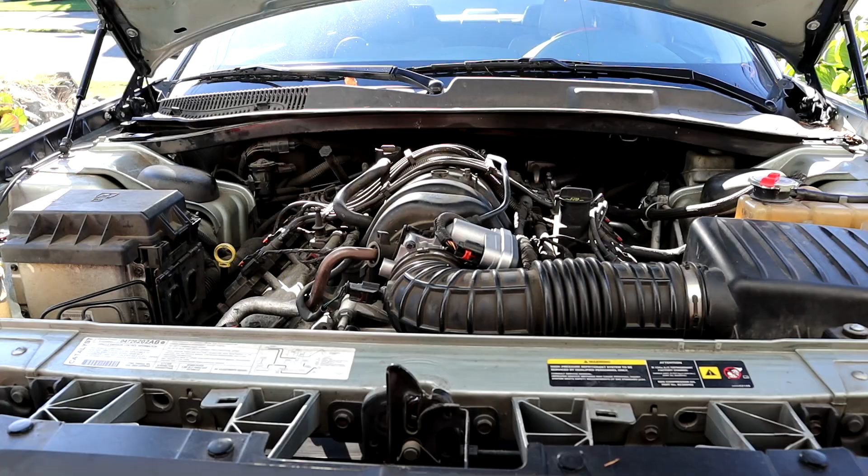However, we do want to take a couple things off this car before we let it go to some junkyard or something like that. And that is, well, probably the most important part of any project. This car has a Gen 3 5.7 Hemi, makes 345 horsepower and some amount of torque, 380, 330, I don't know, something like that. It's actually a pretty good engine, and people have used these engines in lots of cool builds, and we've got a couple build designs in mind for future parts of this channel that would benefit greatly from a nice V8 like this. So we want to harvest it.

That presents a couple problems. One, I'm pretty sure this engine will not fit out the top of this car in my garage. The engine is 26 inches tall, oil pan to top of the valve cover, and the lift gives me, I don't know, another 10 inches or something like that when we're lifting this thing up, and I'm pretty sure that will not make it out of this thing in the garage.

So we're gonna have to go pull this thing the old-fashioned race car way, which is actually go remove this front support here. So that would be this bar that runs out this way, and actually just yank this thing out the front. So that's one problem we're gonna have to cover.

The next problem is where to keep it. So we're in the garage. You see our Doritos Locos project is in here, and it's one of the shorter projects we have. It's basically going to be the shortest project car we could work on in this garage, and there's not a whole lot of space here. This is a big thing that's going to have to go away here, because this is in the way of me accessing all my tools and working on bikes and such like that.

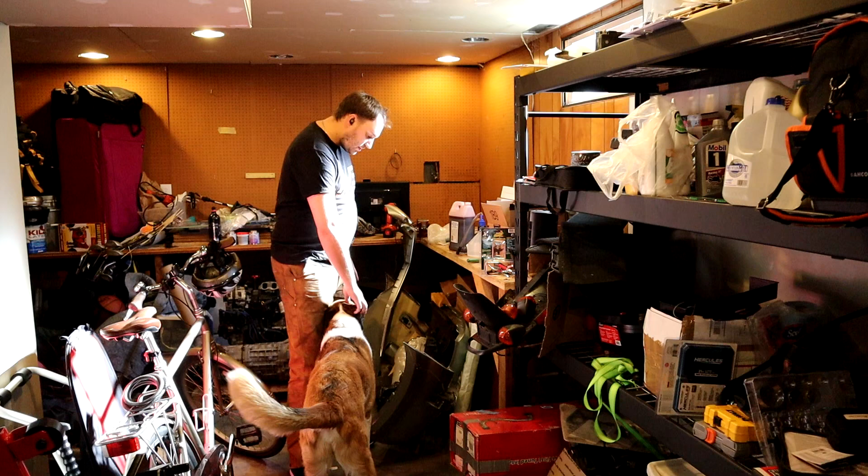So, hello Joe. Good morning. How are you feeling today? Yeah? Yeah? Happy puppy? You happy puppy today? There's so many spiders in here.

Anyway, so the ideal place to store this engine is actually underneath this table. However, I'm going to show you something that makes that particularly difficult. Most engine stands, or engine trolleys, or engine carts hold the engine quite high, relatively speaking, off the ground, because they don't want it to hit the ground, and you want to be able to run over some minor stuff on the ground and stuff like that.

But our engine is already 26 inches tall, and the bottom of this table clears about 35 inches, which only gives us 8 or 9 inches of clearance off the top of our engine where a mount can actually hold it up. So pretty much everything on the market, except for one that someone builds, but I'll show you guys a picture of that in a minute, holds the engine quite a lot higher than that.

Which kind of brings us to our video today, which is designing a new engine stand for our 5.7 liter Hemi that's going to come out of the Chrysler. So at this point, this is going to be a computer-based thing from here on out. So I'm going to go back in the computer and I'll see you guys there.

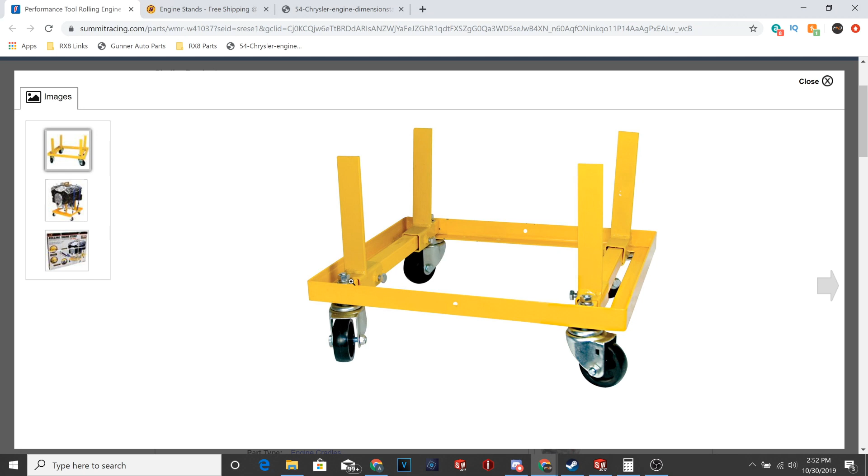Alright, so this brings us to the computer. Got it up right now on one of the rolling engine cradles, trolley stands, sorts of things. This one, as you can see, is kind of just a couple adjustable arms that come up off of a main center cradle here. This is made of L-channel tubing, L-channel brackets and stuff like that. And there's some square brackets in here. So something like this, while affordable, is not exactly what we're looking for.

This next setup, this is from Speedway Motors. They do a lot of cool stands. And you'll see there's a few setups. Most of these setups are actually for small block Chevy, big block Chevy, LS's, that sort of thing. And they've got some mobile ones, like this one down here, or this Chevy V8 cradle that have casters on them, as well as some non-mobile ones where if you're just gonna set it down for a while and move it around with the forklift, this would be fine.

But no one really makes one of these, except someone on eBay makes something that's pretty similar to this setup, this Speedway LS or the GM rolling LS stand. But I'd have to pay $130, $140 plus shipping to get one of these off of eBay. And we can make one of those.

We have all the fabrication equipment, and it sounds like a fun project to go make a rolling stand pretty similar to this, because this has the benefit of allowing us to access the oil pan down below and everything, and allows us to work on our engine without putting it back on the stand. So if you're going to do something like this, the first thing you want to do is try and find as good dimensions as possible on your engine.

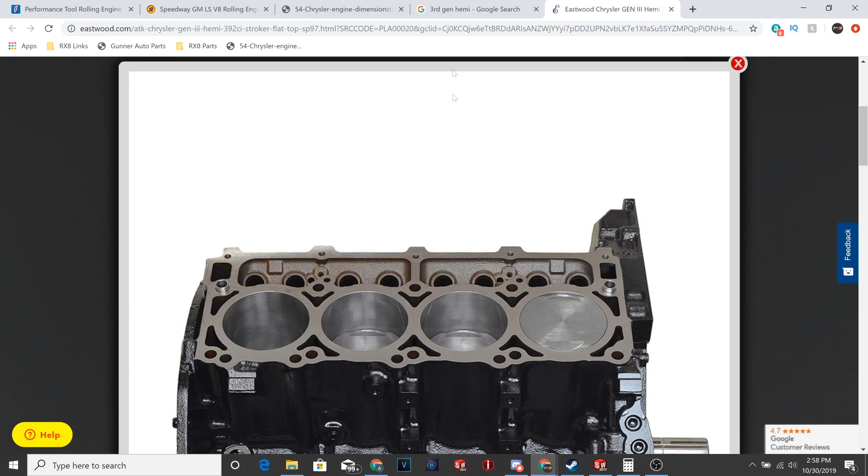So you can actually go in here, and if we get in close, something like this, you go look at this picture, and you can see that these mounting lugs here are actually shown, and one of the dimensions that we know we have is the height of this. We can get the height of the oil pan flange here from the bottom of the sump. And so that's going to help us set our clearance from the bottom, as well as make sure that we're not going too high. So the easiest way to do something like that is actually go into SolidWorks.

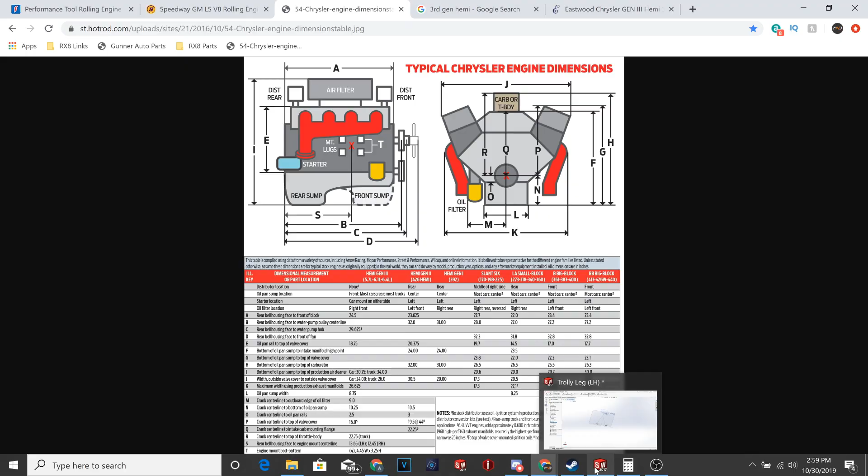I'll start a new thing here and show you what to do. If you're using a different CAD program, most of them have a similar feature. Sketch, we'll create a sketch here. We'll create it on the front plane. And then actually there's a tool in SolidWorks, so you go into your sketch tools, and it's called Sketch Picture.

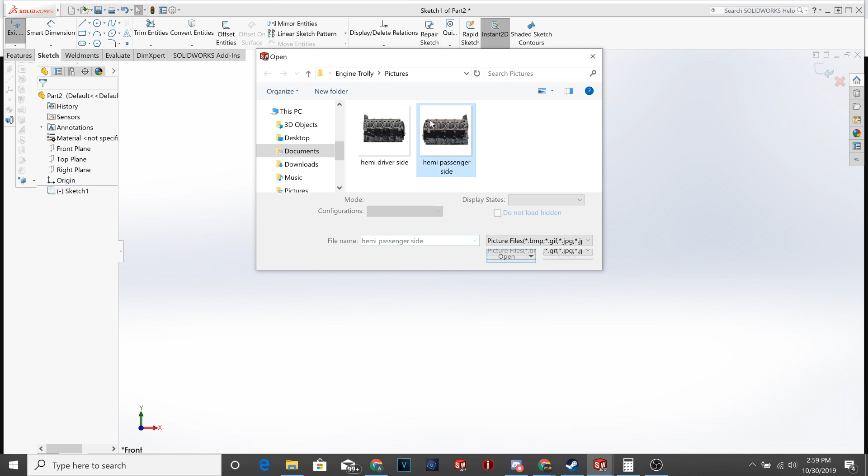And you can throw in a picture like this. And so it's going to go in at whatever scale bitmap it wants to. Maybe. Hopefully we don't crash this. Notice this is huge right now. But this is a picture to scale, and it's a pretty close side-on view.

You'll notice this is supposed to be, if you're looking at an engine, this is a flat surface, and this is a flat surface. So these are angled a little bit, which means essentially every picture, if you're going to use a picture like this and not a diagram or schematic, every picture is going to have a little parallax because the camera lens is very small. The camera lens is like the size of this area, and so it's catching everything. You're getting a little bit of fisheye going on pretty much with every side picture.

This is why if you were going to try and use photos to measure everything on this block, you'd actually take several photos from every angle and then use software to stitch them together so that you can account for that fisheye by catching everything from multiple angles. But something that looks pretty close right here. And so what you actually do is go, yep, sketch picture looks fine.

And then my suggestion, if you can do this, is actually draw over the picture. Let's say we're gonna draw something like, I'm gonna draw that, and move this so that it's, oh gosh, why are you doing this to me? Computer, delete. Move it so it's on this edge here, and then you draw another center line somewhere over here. Make sure they're vertical.

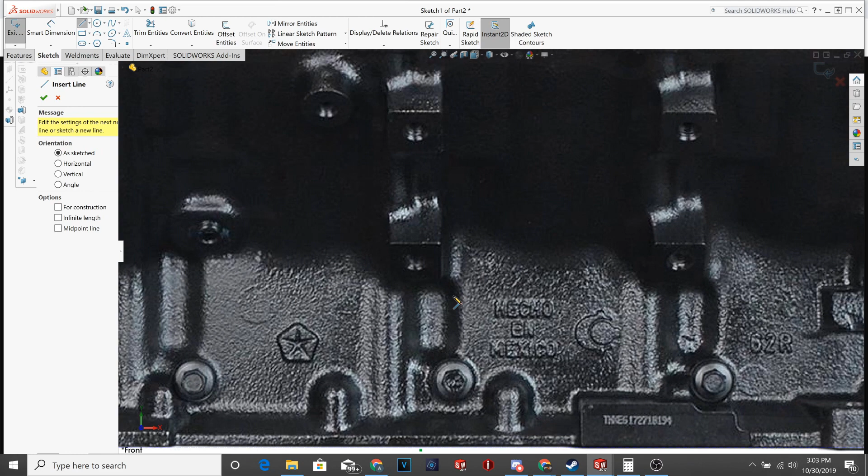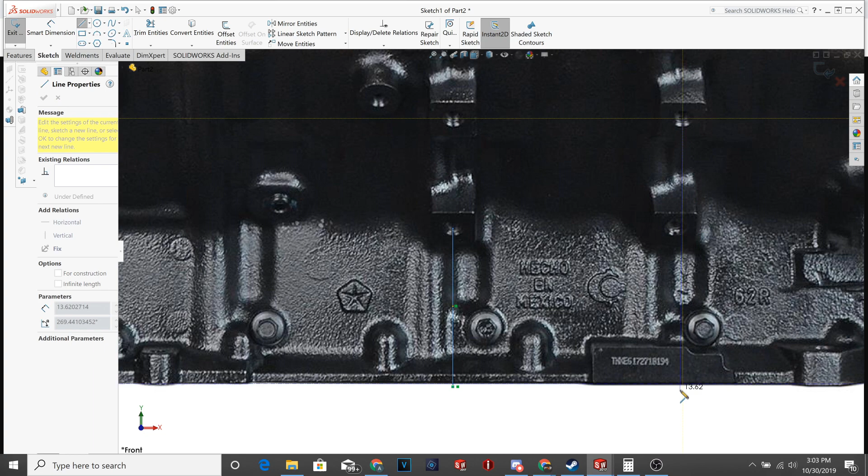Quick little thing, we're going to extend entities, extend that, and that's good. And then what you can do is, if you zoom in a bunch, you can actually find the center line. Notice these are off axis, but you pick something that looks pretty close to the center of your hole and draw a 90-degree line straight down to that construction line we made earlier. And then you can even do this, pick what looks like about center line of that hole and draw a 90-degree down that center line.

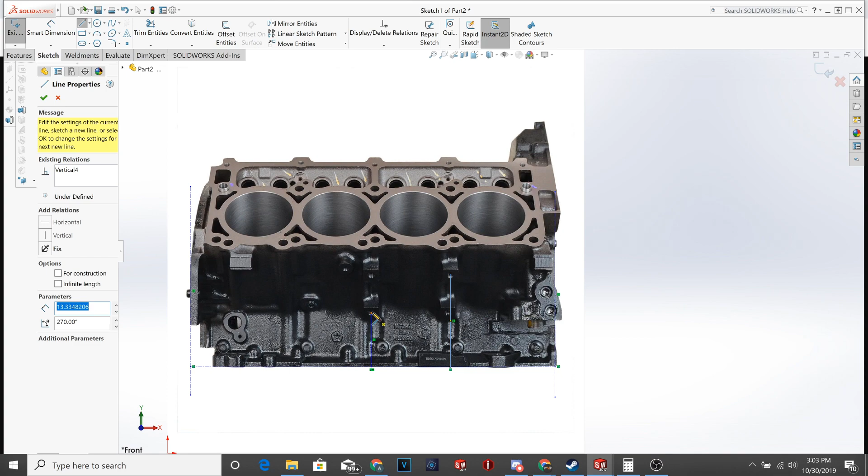And then these can give you a couple things, but what it can essentially let you do is triangulate the center points of, and you'll notice the camera parallax is going to get us here, because look at this, we're at the center of this hole here and this one's not lined up, and this would be the same up here, right? Which is not ideal, and some of these nubs might also be offset. These are some of the things that we have to just assume, that these are pointing straight out of the block and they're not offset or anything.

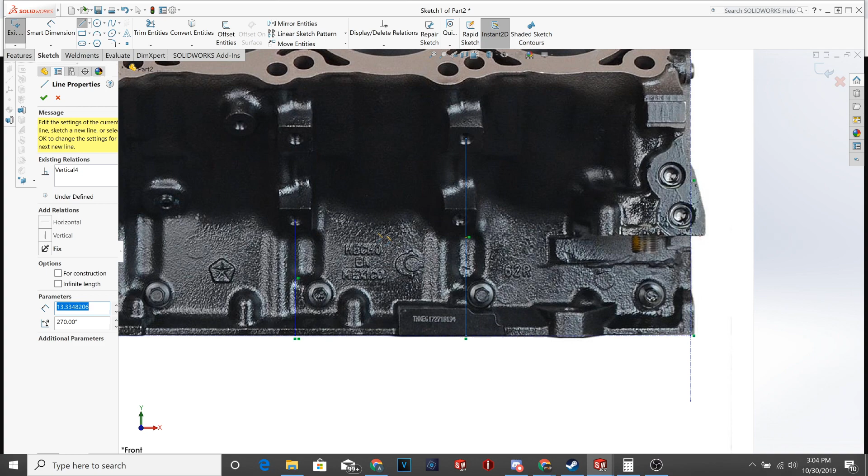But some of the camera parallax will get us here, but we can take those measurements and we'll just toss a measurement on this right now. We don't care what this number is right now. We're not using this to set anything. And then we'll get a measurement over here, and then we'll get a measurement here. So what we use this measurement, this is the block front to back, pretty close, right? So the idea is we can scale this entire sketch based on this measurement block front to back and compare it to our block measurements here that were taken on an actual block. So the rear bell housing to the front of the block is 24.5 inches, according to this right here.

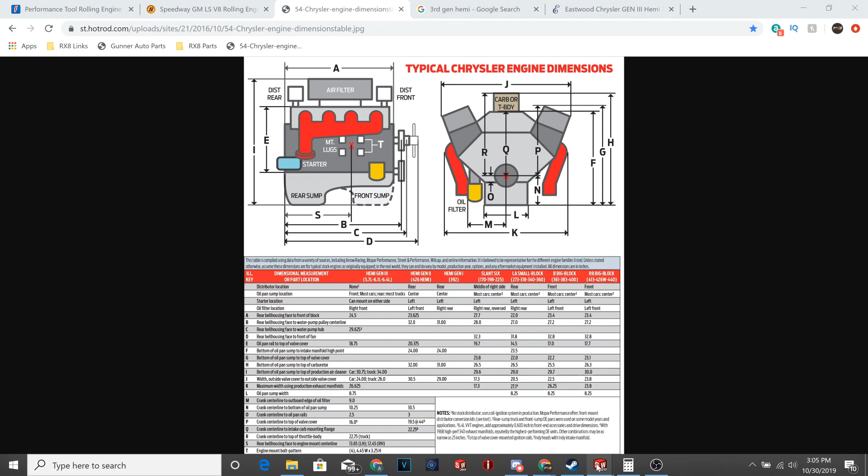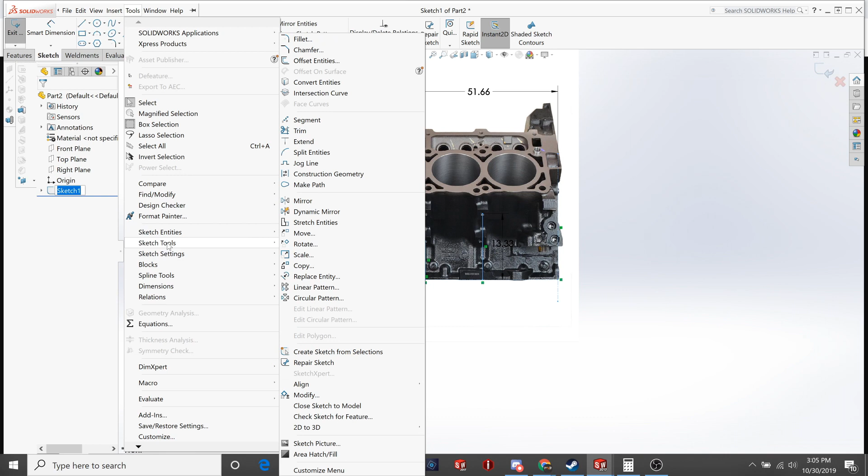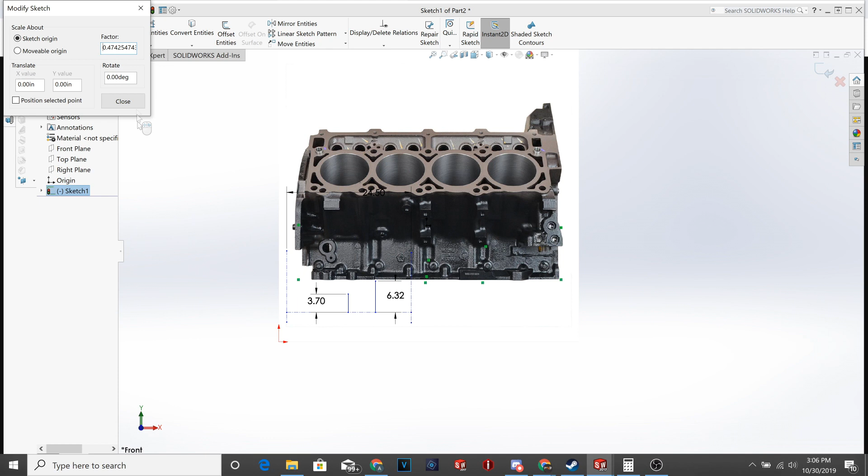So what we'd actually go do in this sketch is, yep, that all looks good, cool, and we'll get done with this sketch, and then we'll go in here, sketch tools. We'll modify this sketch, and we will actually scale this. So this is a scale factor here. And we're going to scale this on a scale of 24.5 divided by whatever this front to back measurement is on our current thing, so 51.66. And if you do it right, we'll close this, rebuild that, and then we're just going to suppress this background here.

We open up this sketch again. You see that this front to back measurement that we just took has been scaled down to our normal measurement, and we get two measurements for verticals to the center line of our holes, and that's 3.7 inches to the bottom one and 6.32 inches to the top one. These are probably a little bit off, but note that our spreadsheet of information says it's a 4 bolt hole pattern approximately 4.5 inches by 3.5 inches. This is less, but we're catching 45 degrees of angle approximately. So these heights help us identify where the center of this piece is. And when you do the math, it's about 4 to 4.5 inches right in here where this piece will center line.

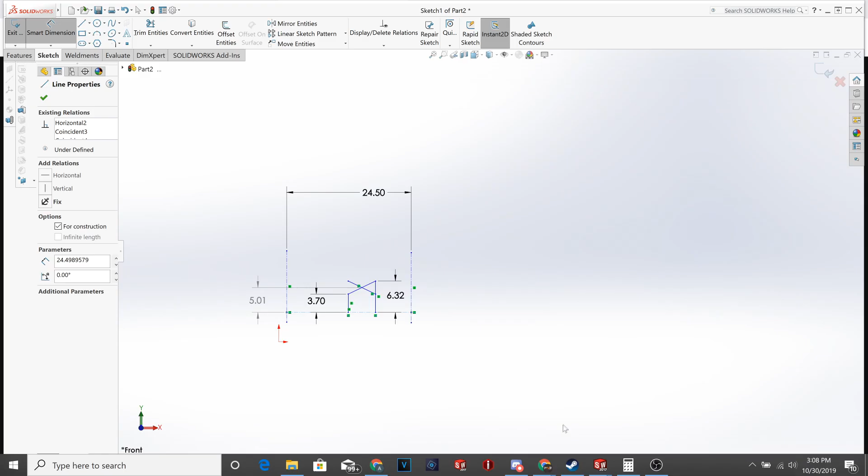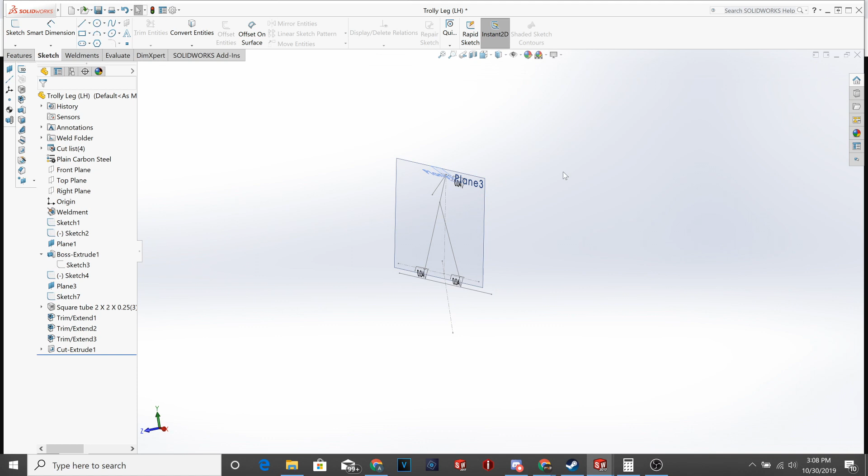So what we did here is we created a sketch. And we had to do several different planes. This is like your main bar down here, and then we located the center line of our plane of our mount bolt area up here, and we created a plane and a sketch up in here, and then we actually created ourselves something here. One thing to note, if you're going to build something like this, you don't want to draw a line straight from the center line of your mounting part here to the center line of this, because that's not actually how you're going to build it, which is why we drew our line like we did. So we'll get this back up once the computer catches up.

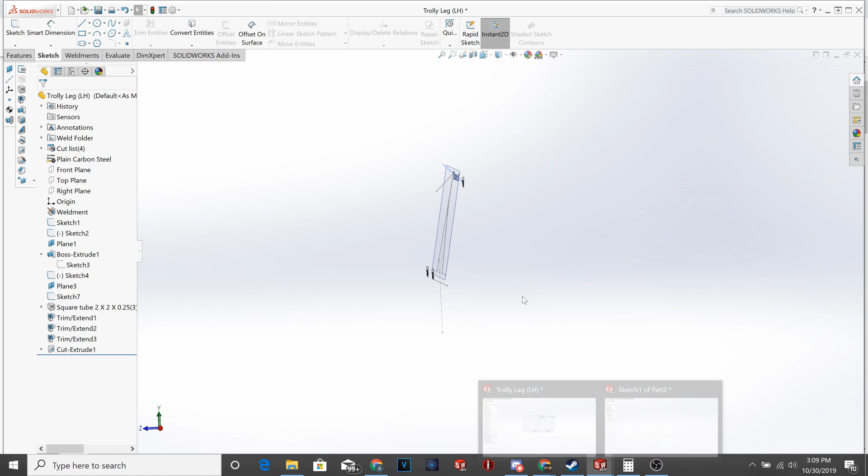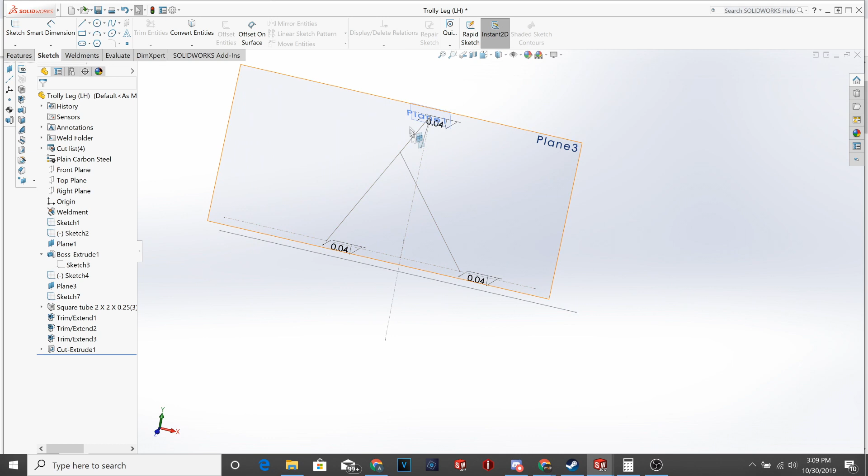We actually offset the line by 1 inch, which is the distance from the center line of our tube to the outside of our tube, and we're planning on using 2x2 square tube in this construction. So we created one line here and one line here, and then I'm going to unsuppress a couple things here. We're going to make this visible, and we're going to make this visible again, and it lets you come up with something like this. So this is our final design.

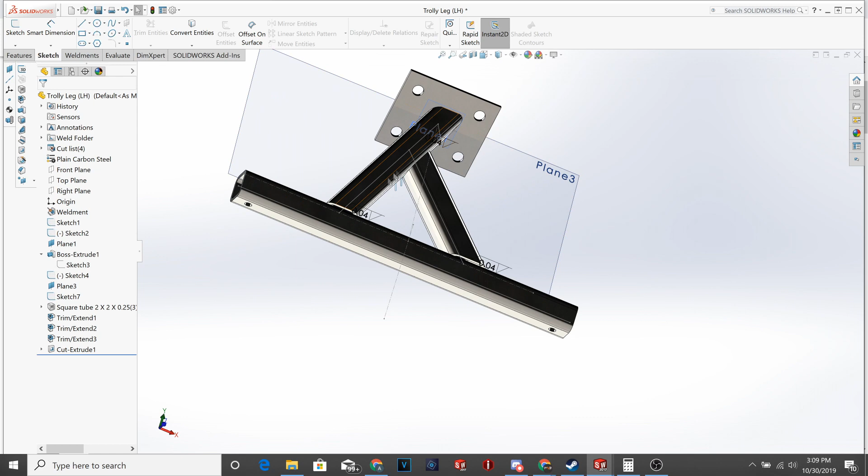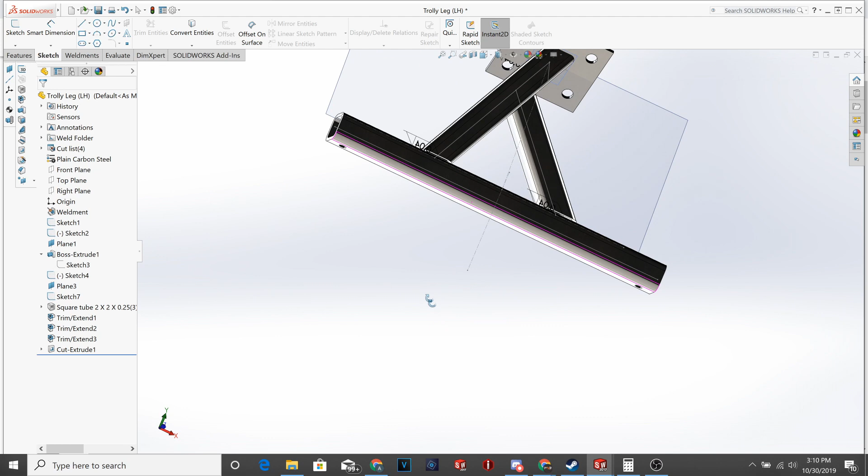Note we had to mess around with this tube location a bunch because we want to have enough clearance to get a bolt in this bottom. This looks like it'll be enough, but I mean, we'll see when we actually do it. If this doesn't work well enough, we'll just have to keep adjusting it until it works. But note, so we've got this, and we've set some materials so we can do some strength analysis on it, and then the only other assumption is we made the assumption that this mounting plate needs to be at 45 degrees from the vertical.

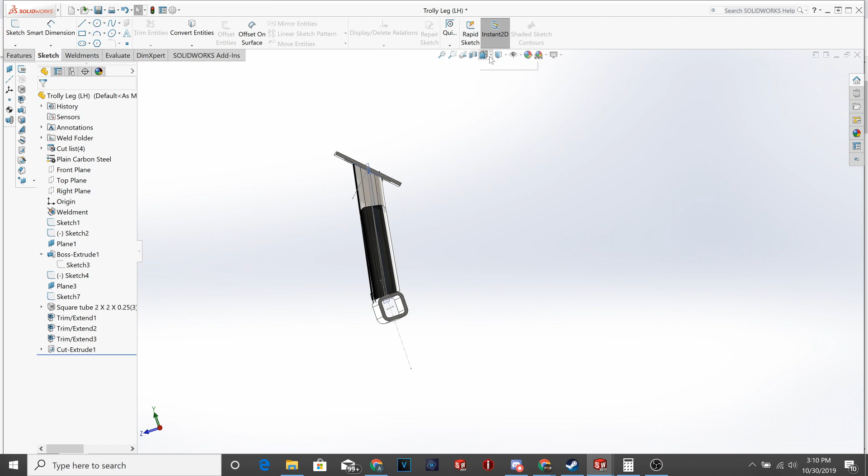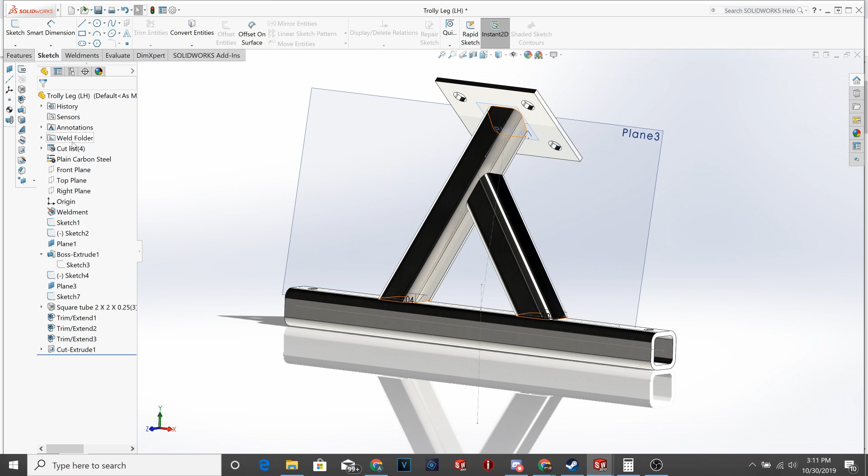So that's where we set that. That's pretty much the only assumption we made here. The other thing is, what's useful about this is if you look over on the left here, it's got a bunch of things. I created some welds in here so I could know about how much length of weld I'm gonna make, but it can also give you a cut list.

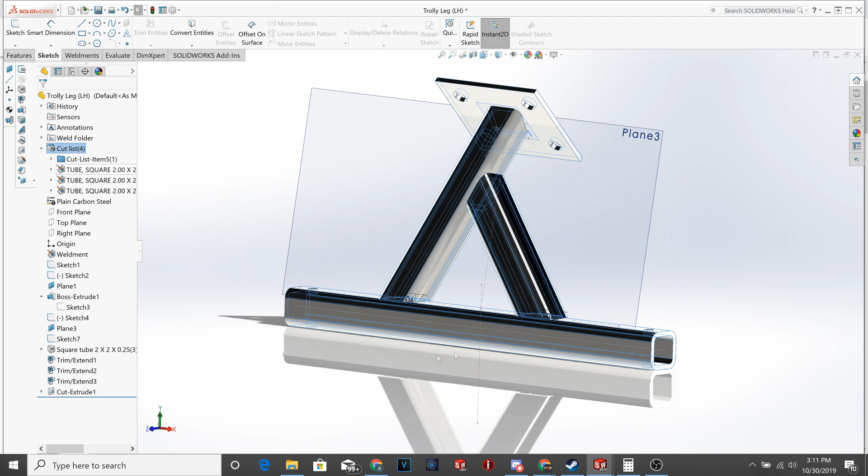So if you don't have the ability to cut material yourself, you can actually use most CAD programs. SolidWorks does this. I'm pretty sure Autodesk Fusion 360 has a feature that will allow you to do this. You can actually have this program spit out a list of cuts and angles, and it keeps track of all of these angles that we're making. So you can actually just send that to your metal supply shop and have them make the cut. And then all you're doing essentially is assembling everything together and putting the welds on if you're going to do that yourself.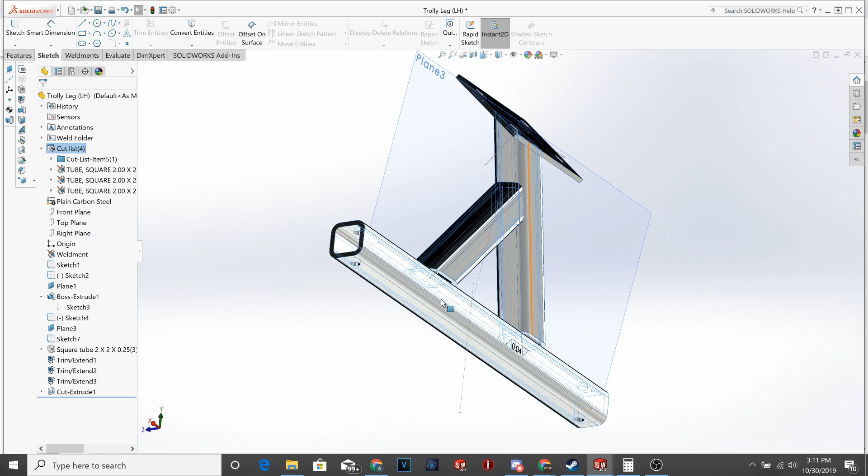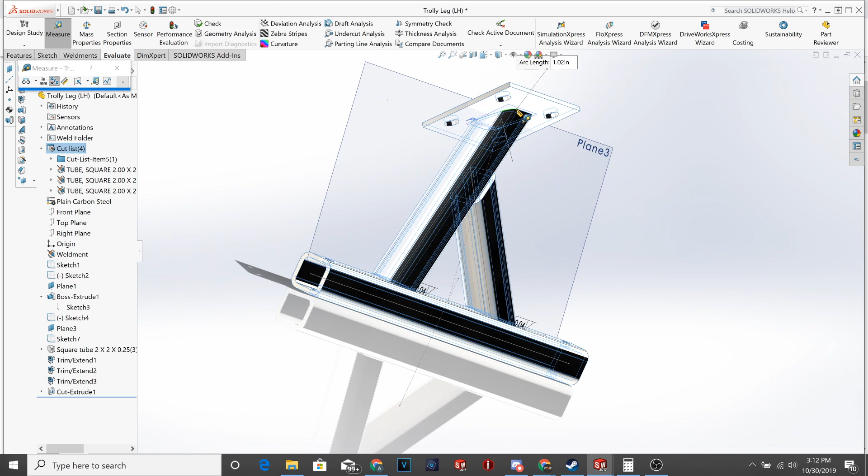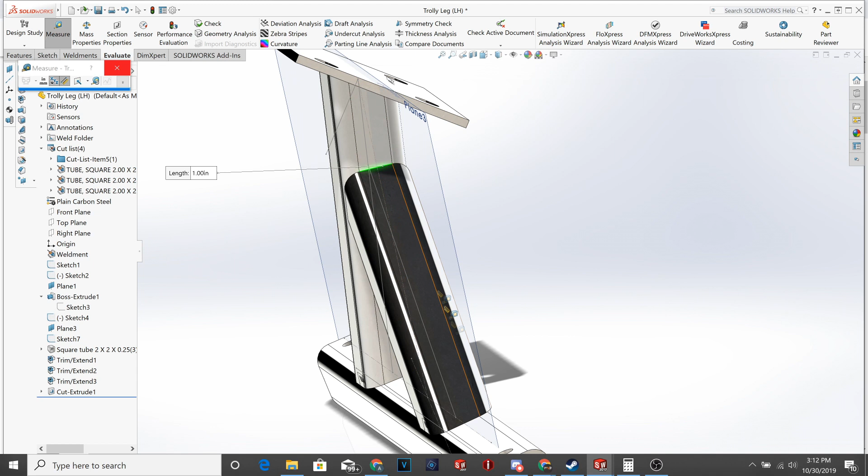But we're going to actually fabricate this ourselves, but this will let us estimate some lines, so we can estimate how long this piece needs to be. This to this is 11.41 inches, right? So you need 11-ish inches here, and then this piece is 24 inches. We can also measure this piece here. So this is measure that edge to that edge. And that's 9 and change inches.

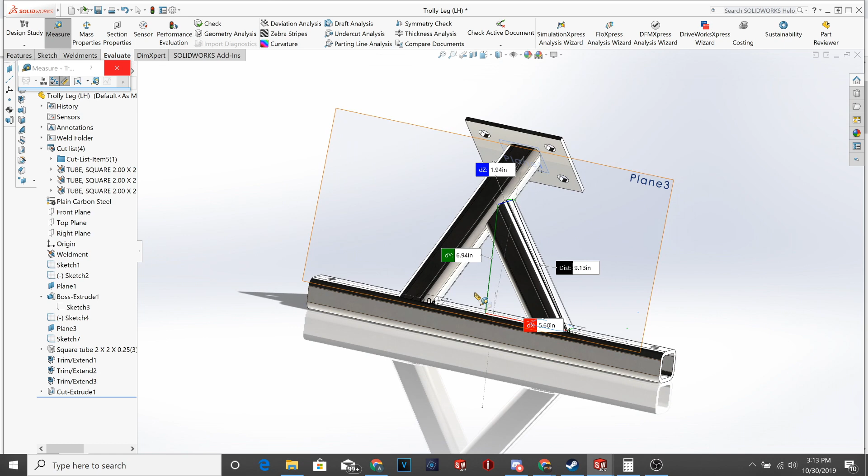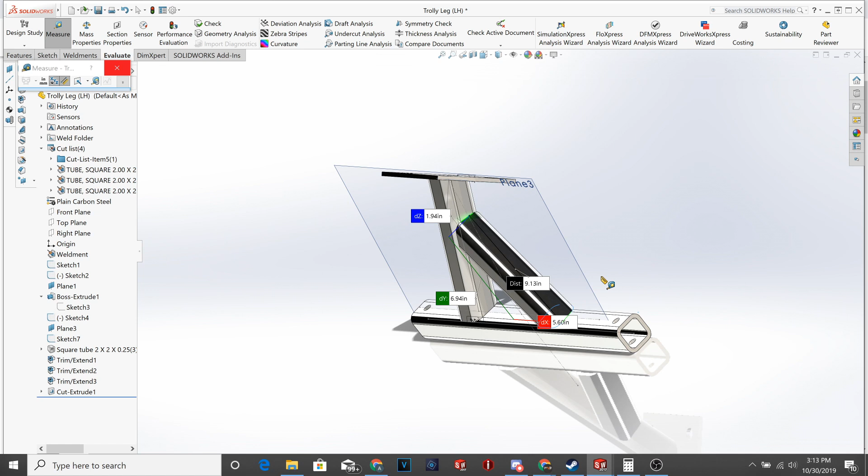So if we're going to make two sides of this, and the only real difference is we might adjust where this is located on the runner on the other side. If we're going to make two sides of this, we have 24 inches and 12 inches and 10 inches. So we're looking at 12, 24, math, 36, 40, 20, 20, 34, 46. 46 is the answer, everyone. Looking at 46 inches of tube per side. So you're looking at 92 inches. You're basically going to want a 96 or 108 inch piece of tube.

So that can help you go to the metal supply store, so you're not going to go there and show up short or buy too much, because having too much extra is just a waste of money unless you're going to use it to practice or what have you.

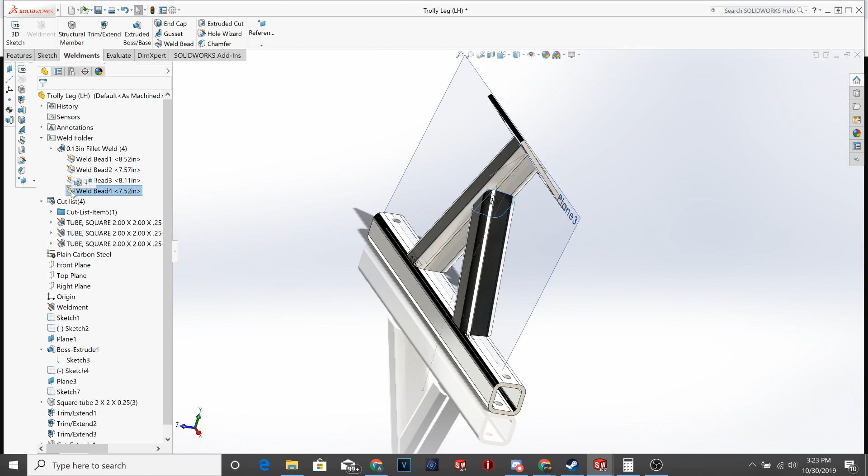One other thing I did want to mention while I was doing weld beads, I just wanted to show you guys what you can use this for if you're trying to get a little bit more fancy with your stuff. So I created a few different weld beads here. Show you this one. And so I think you can do this in Fusion 360. You've been able to do this for a while in this. And what you can do, you can specify a weld and your weld path and your actual weld size. And that'll give you a total linear weld length. In this case, it's 7.5 inches.

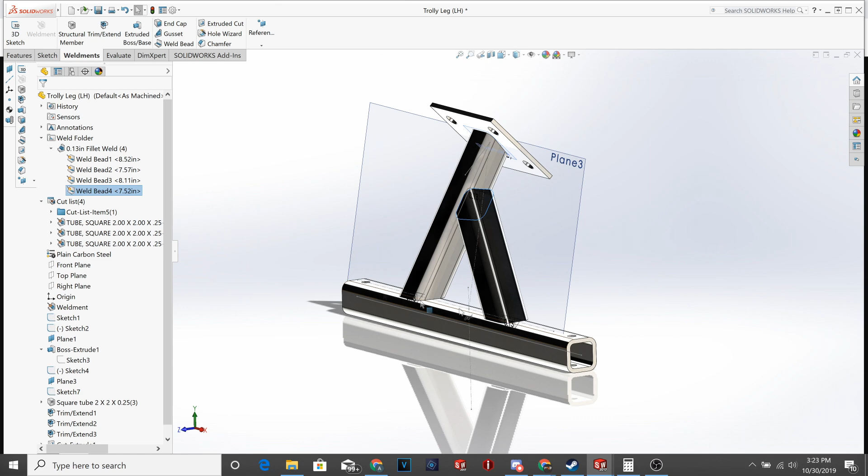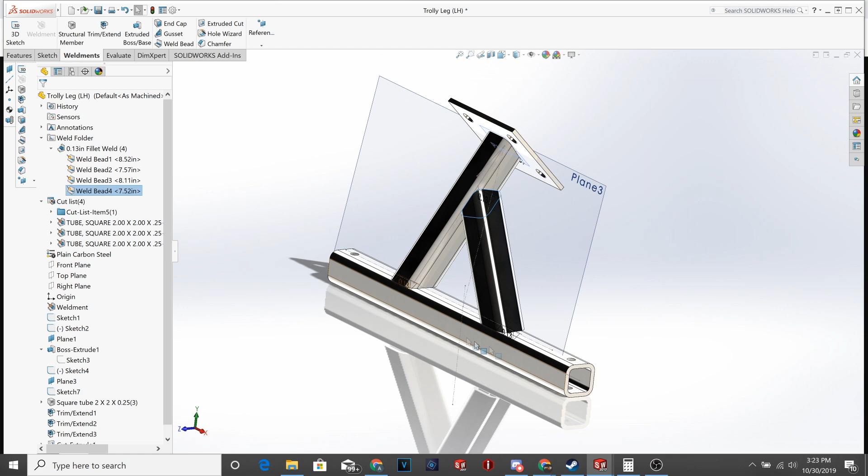And if you're going into production of this, let's say I was actually deciding, hey, for some side income, I'm going to build a bunch of these and sell them out there for some reason. You can actually use this weld length plus your fillet weld size. In this case, I specified 1/8 of an inch fillet weld. This just for kicks and giggles. It's probably not what I'll actually end up welding it to. You can actually estimate the amount of weld wire that goes into each one of these if you're trying to do a cost-benefit analysis for that thing. So just a cool tip. I thought it would be fun and interesting for those of you who care about kind of the production side of things.

So this is pretty much our version of those engine storage racks. These holes here do mount our casters through them. Right now they're modeled as like a single all-thread piece. This I'll adjust as we go based on the type of casters we end up wanting. But yeah, that's our new mount design.